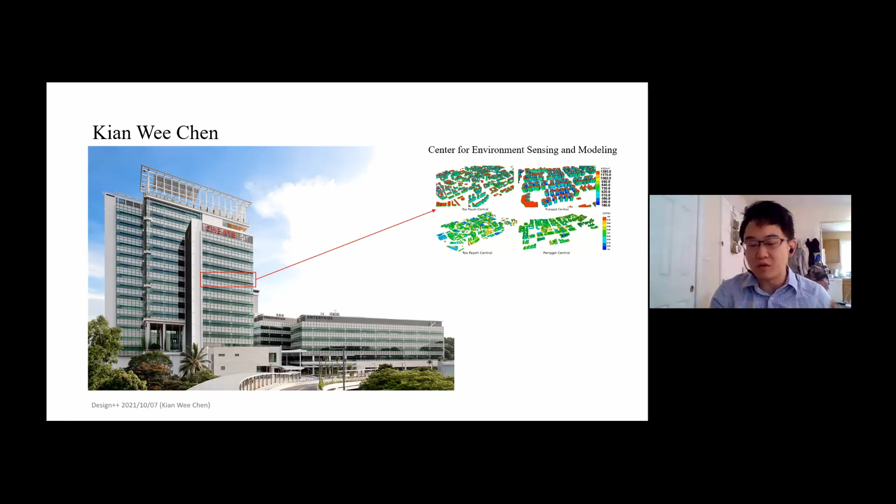In CENSAM, I work with a lot of non-designers, like urban climatologists, and during my stay here I was exposed to many different ways of working, and that inspired me to look at things differently in my research.

After my postdoc, I got a Distinguished Fellowship from the Andlinger Center for Energy and Environment in Princeton. So I flew halfway across the world to where I am currently, in Princeton. There I'm working with Forrest Meggers, who is an ETH Zürich alumnus too. We went back into looking at radiant cooling systems and how to more efficiently cool in the hot and humid climate. Again, we built physical prototypes to test out the system.

So back to the topic: algorithms, models, and data in the design process. Within all those projects, I've always been the guy at the back, handling or managing the models, the algorithms, and the data being collected in these different projects.

And what is the objective of using algorithms, models, and data? Essentially, it is to bridge the gap between different disciplines, enable designers to quickly get answers from models and data, and streamline that whole process so that it's easy to do, and designers can actually concentrate and focus on the creative task.

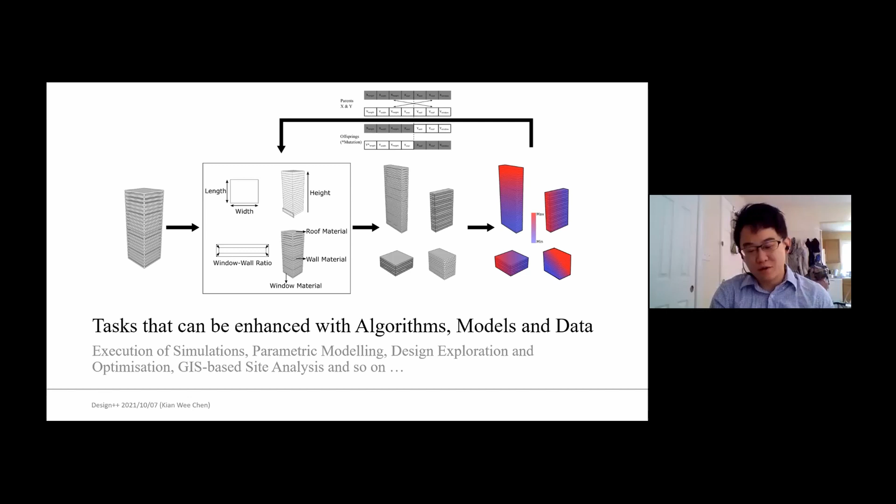The first project: processing terrestrial LiDAR scanned trees for multidisciplinary analysis. This was a project I did with an urban climatologist back in Singapore, who was doing carbon accounting. One of the problems is that he didn't have good detailed information about above-ground biomass for trees. He was essentially measuring them with a measuring tape and then estimating the carbon mass of the tree.

At ETH Zürich, in FCL, we had a terrestrial LiDAR laser scanner lying around. So we got our hands on it, and then we went out and did the scanning.

So you can create this whole scene of your interest. But the main issue with terrestrial LiDAR scanning is that it's unstructured point clouds. It's very hard to say how to get the trees and how to calculate the biomass and so on. So that's where I come in. We went down to scan, and I tried to develop a way to extract the tree of interest, take out the leaves, get the branches, and calculate the carbon biomass.

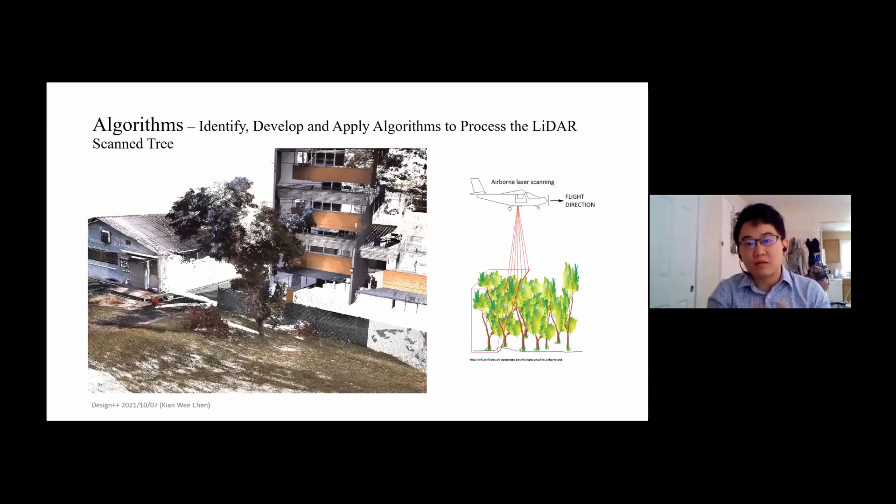So I developed a whole set of algorithms to do this. To start with, the first thing is how do you scan a tree. A tree of interest, you want to scan at least 3 points, three anchor points, so that you get all the facade of the trees.

And then once you get the trees, you combine the tree scans together. It's also important what hardware you're using. You need a specific wavelength of scanning so that it's easy to separate the leaves from the branches. Only certain wavelength scanners allow you to quickly separate the leaves from the branches.

Once you separate the leaves from the branches, this first 3 steps is kind of semi-automated. You interactively cut out the tree and so on. But once you get here and use the right scanner, you're able to separate the leaves from the branches. Then you can skeletonize the branches, and get the biomass of the tree. You can also get the branching order, the architecture of the tree.

For any botanists or people studying trees, it might be interesting to study the tree architecture and so on. The skeletonized tree volume was used in a carbon accounting model. Interestingly, what was found kind of supported the claim that trees are not a carbon sink in tropical cities.

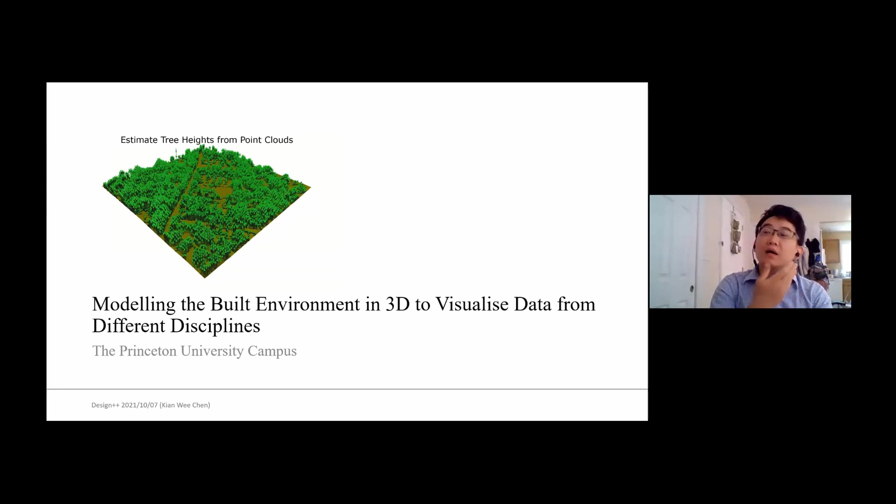So this is a project that tested that out. In this project we got the digital elevation model, the airborne LiDAR point clouds and so on, and the building footprints.

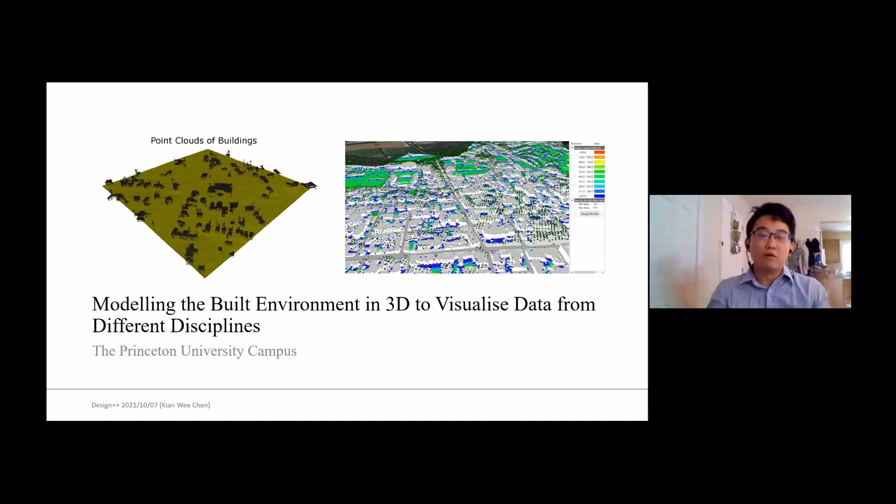And we were able to recreate the 3D environment of Princeton based on totally open geospatial data. And then we ran a solar analysis on the whole area.

One of the motivations was because one of the physics students, for her final year project, was interested in looking at powering a personal electric vehicle on campus. Is it a viable option to move around campus with just a solar powered, totally solar powered personal electric vehicle? It's also because the facilities staff at Princeton campus drive around in this little golf cart.

So she was interested. So we installed a solar panel on the golf cart and optimized the engine for solar charging and so on.

But essentially what I'm working on was to create this 3D model of the Princeton environment, which also has tree coverage and so on, so that it's possible to collect data on the golf cart routes and figure out their use ratio, their use to parking ratio.

And with the model and the solar analysis, you'll be able to find the optimal parking space. For example, if they park somewhere, make sure that it's not blocked and so on. So with the 3D model, you will be able to do that.

Because the main user of this kind of model is people not from architecture, the idea is that if it's an architect, probably Grasshopper or Rhino is accessible to them. But for a physics student and a mechanical engineer who was installing the engine in the cart, it's just not possible to get them to learn Rhino, right?

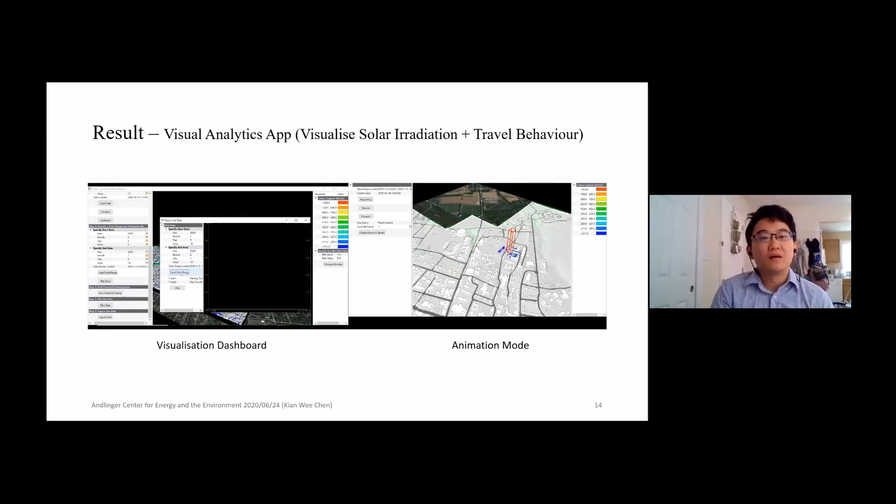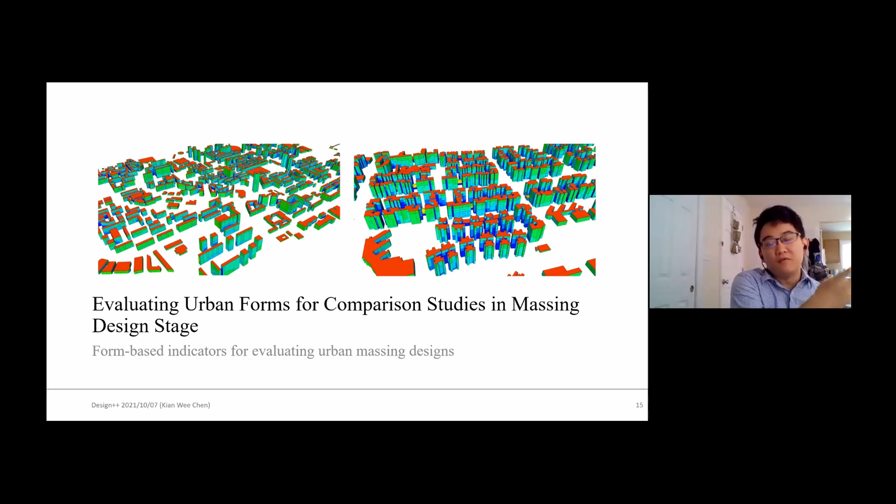So the third project is not so much about representing the 3D site, but in this project it's about evaluating it. So if you have a representation of the site, a 3D model and so on, how do you evaluate it? How do you know that this region is performing how well in relation to the other region?

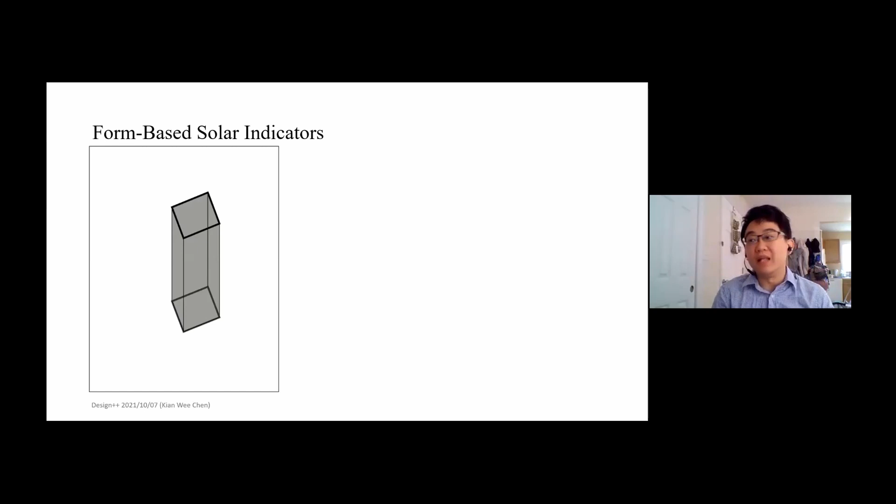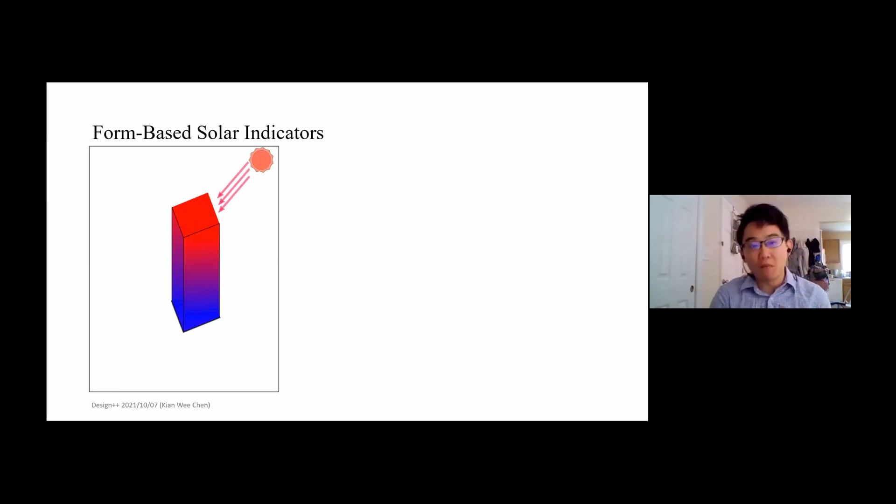The idea was to find a bunch of indicators, essentially a bunch of models that can inform the performance of a neighborhood, for example. So what I did was I found 5 indicators based on urban forms. As long as you have the physical form of the geometry of the site, you'll be able to perform this analysis.

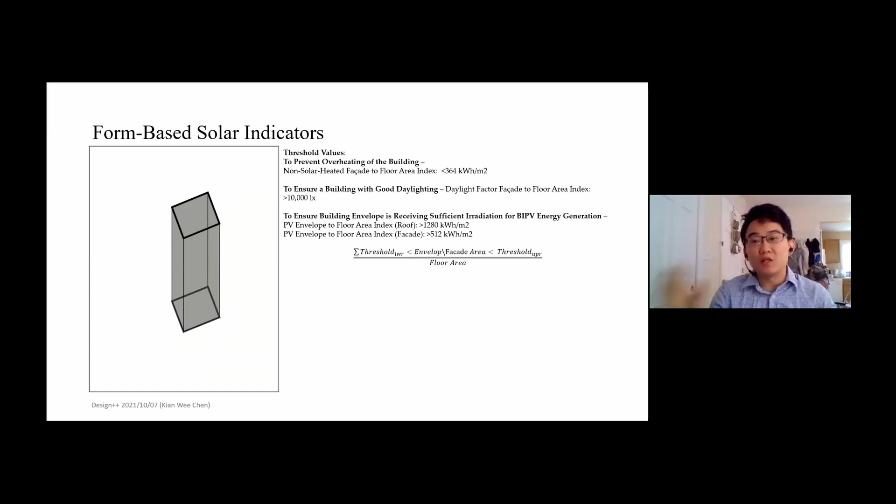So the first 3 are kind of solar based, where we run a solar analysis, let's say on a building, and then we have a ratio between envelope facade area that's within a certain threshold and divide it by the floor area.

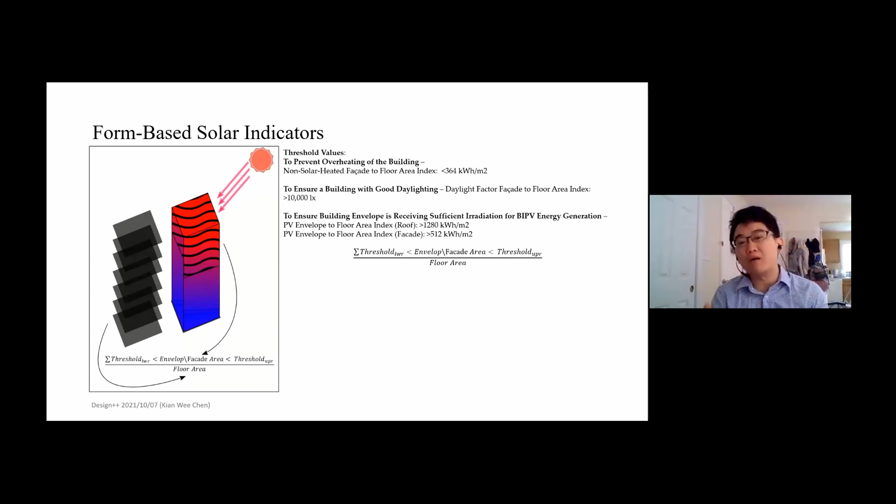For example, if you have daylighting, you want enough daylighting on the facade to serve the floor area, right? So you normalize it by the floor area, and then you have an idea of how well the envelope is performing. So if you run it on all of the buildings, let's say in a city, you can roughly have an idea of how well the morphology of that whole area is performing.

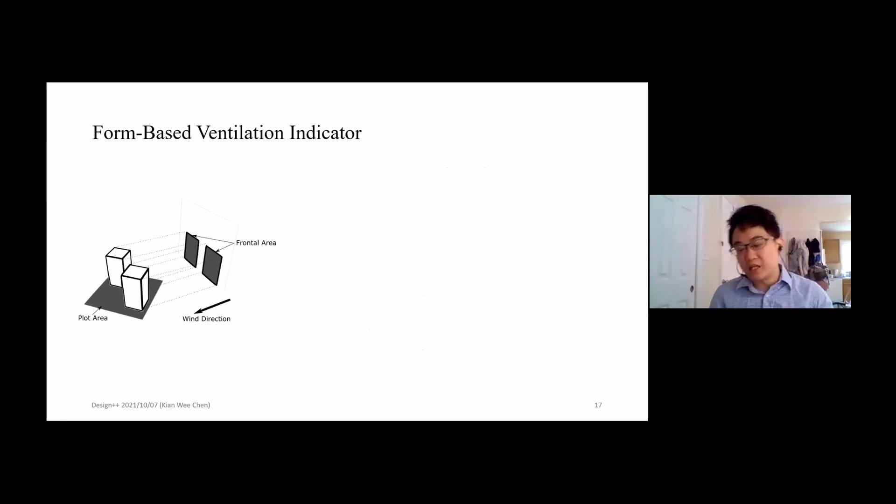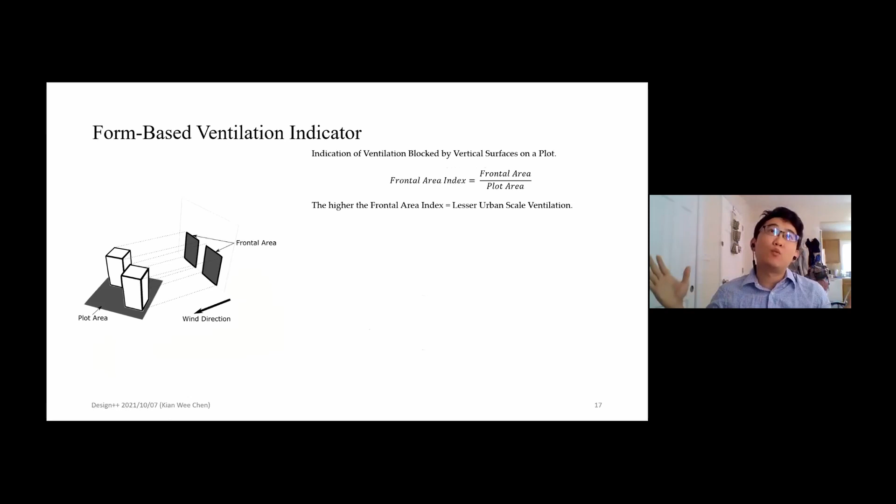In a solar sense. So the other indicator that I did was a ventilation indicator. They call it frontal area index, where you project your building envelope to the wind direction, and then the frontal area is divided by the plot area. So you have an idea of how much wind the building is blocking.

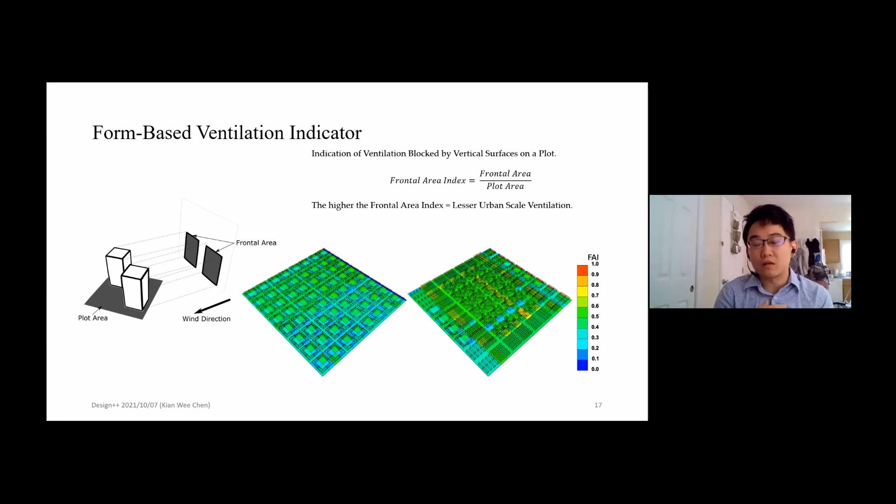So again, if you apply it to a big region, you can roughly have an idea of how well ventilated the neighborhood or this precinct is according to this indicator. You want it to be as low as possible. And this is a mobility indicator.

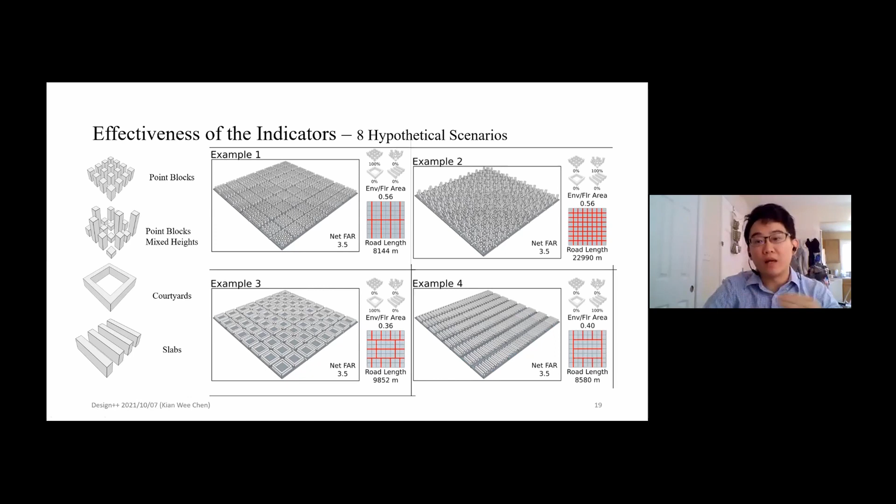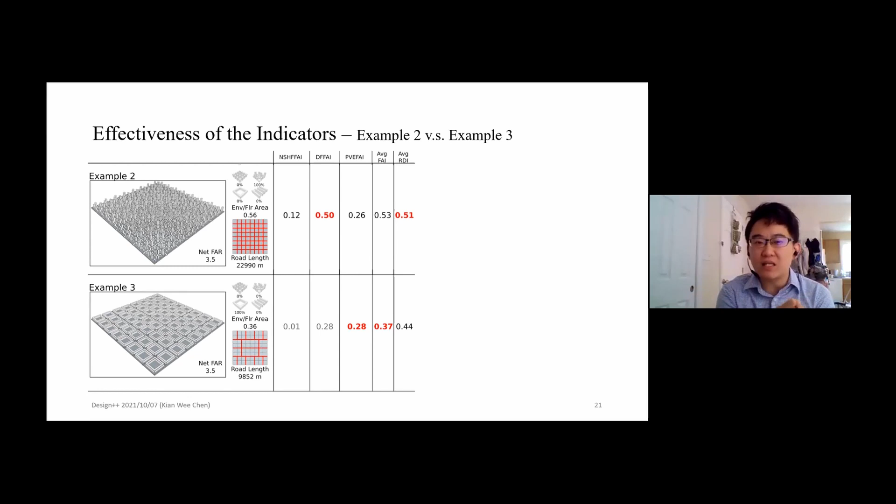So I did this on 8 different examples of different settings and different typologies, and these are the results. In short, it was able to detect morphological changes, but this is condensed into a single number where you can quickly see what's happening. It's much more effective if you were able to go into the model and see why the indicator is so.

There's of course still a lot of room for improving what this indicator can be. But essentially, the modeling and the solar analysis could still be used. You can see in example 2, it's performing quite well in terms of daylight availability, and for example 3, it's performing very well in terms of a frontal area index.

They're all building in terms of the same density and so on. Depending on different morphology, it will be good for different indicators - for ventilation, for solar, and so on. You can see the frontal area index is much better for the courtyard as compared to a mixture of point blocks and other typologies.

And this is the route directness index. If you use a full grid, the route directness index is the best, 0.51 here. But if you just reduce it - this is the road length, it's like 20,000 meters of road length compared to 9,852 - you only have a 0.07 reduction.

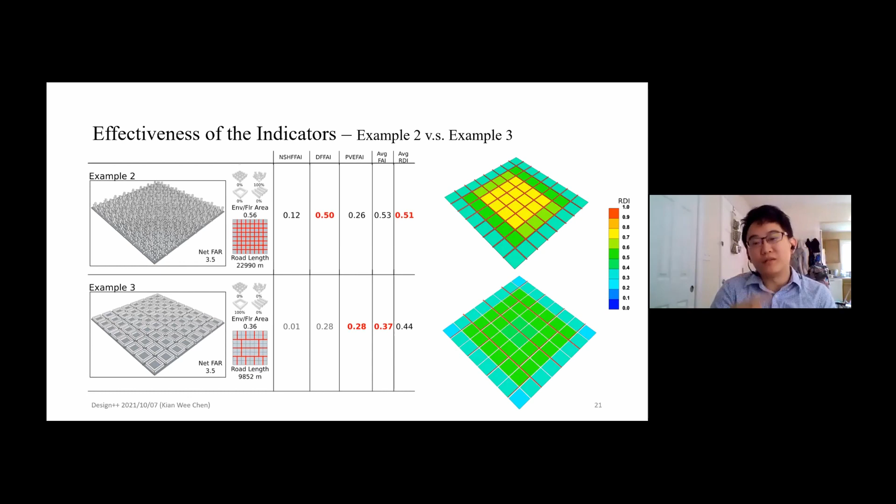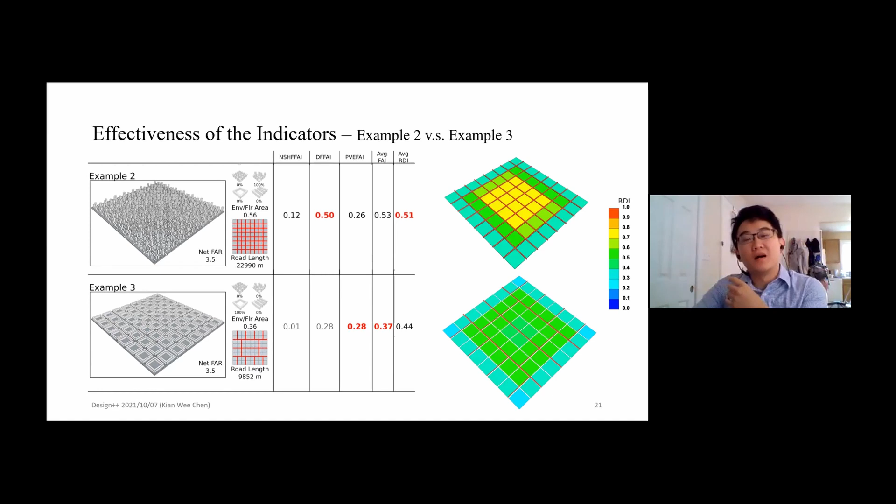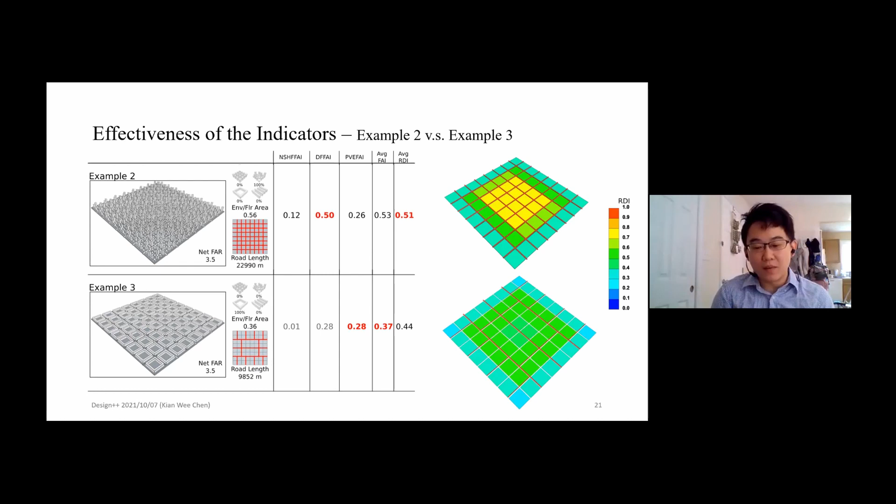This is something we still have to calibrate with empirical data, like what does 0.07 mean essentially. It's a half reduction in road length, but performance-wise, it's not that significant, it seems. So is this something worth pursuing? That kind of set of performance would give a designer better information to make a decision. Overall, fitness-wise, this seems to be the best example.

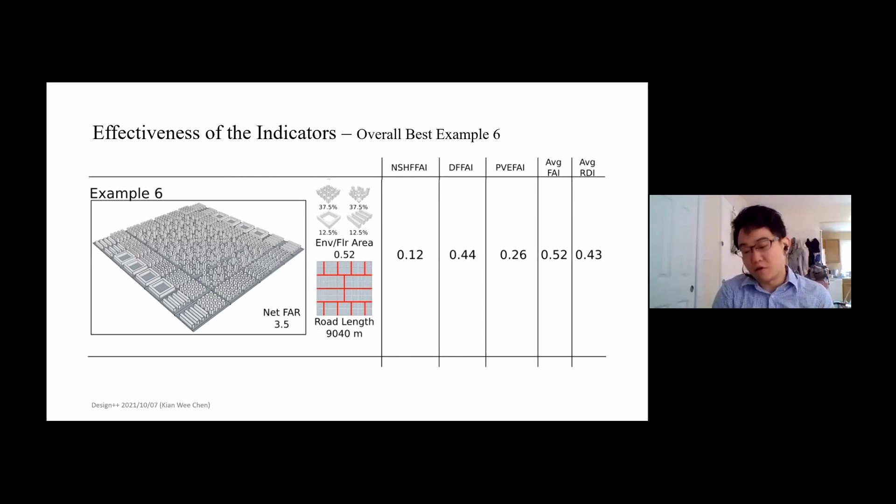So what I proposed at the end was that in Singapore, Singapore is divided into 51 regions and areas. What we can do is run this for all 51 regions, so we can have an idea of how each region is performing. And then we try to calibrate it - what does this indicator mean? What does 0.13, what does 0.37 in daylight availability mean?

So you perform this indicator on a big set of data, and then have an idea, and probably you have to go down and get some more real-time data than model simulated data, and see what exactly this number means. If possible, we can set national standards on what would be a good set of performance indicators to look at when designing for a neighborhood. That's the motivation for this project - to introduce a set of indicators that might be useful for planners.

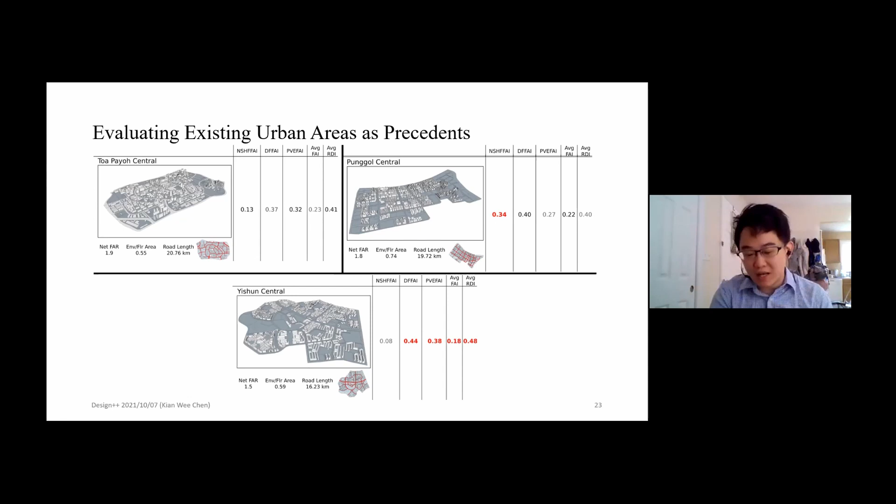So the next two projects are mainly about applying these design technologies in the design process. The previous three were more about evaluating and understanding the site analysis and the site. These two are really about applying it in design and how architects can use these design techniques in their design process.

So in this project, I'm using multi-objective optimization to optimize building form and envelope and cooling system to improve building energy performance. So the main aim of this design technology is to put it in the hands of designers and show how they can use it.

So first of all, in the multi-objective optimization process, you have to define your problem. The most classic and conventional problem in the design of an envelope is daylighting versus cooling. The more daylight you let in, the more it will increase the cooling load. This is in a tropical climate. So you want to get the right amount of daylighting, but not too much, so that the cooling load is still within a good

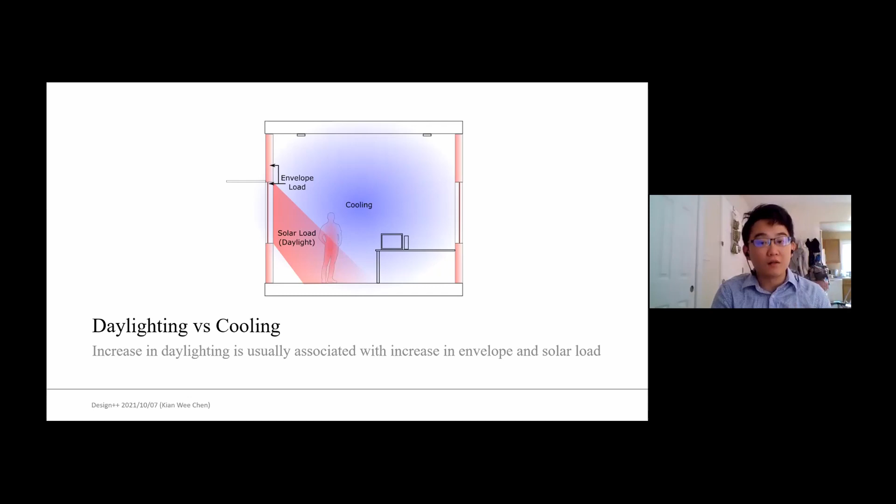load. So in this optimization process, we are looking at the envelope design, and if we are using a different cooling system, how would that affect the envelope design? So we are comparing the two main types of cooling system, radiant cooling and air-based cooling. You can see on the left side is radiant cooling.

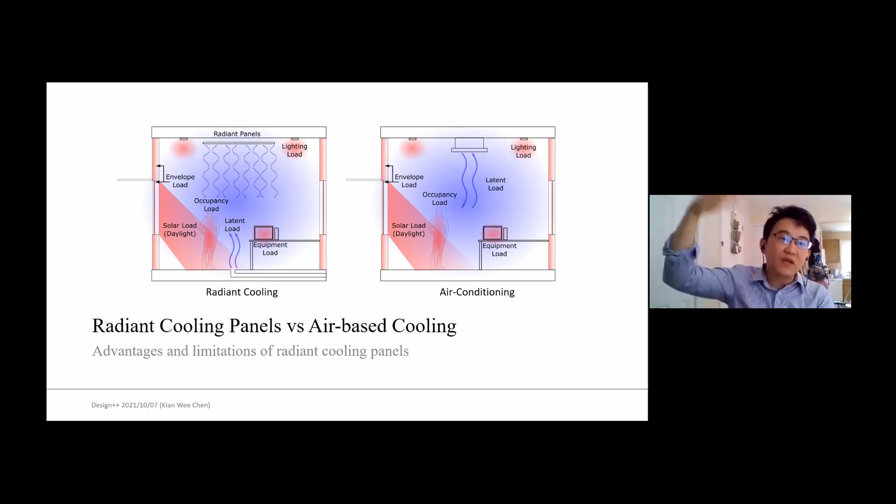Essentially radiant cooling is cooling by radiation. You cool down the surface of your interior, and that surface exchange removes heat from the occupants, as compared to air-based, where you throw air into the space and then that air cools down the occupants.

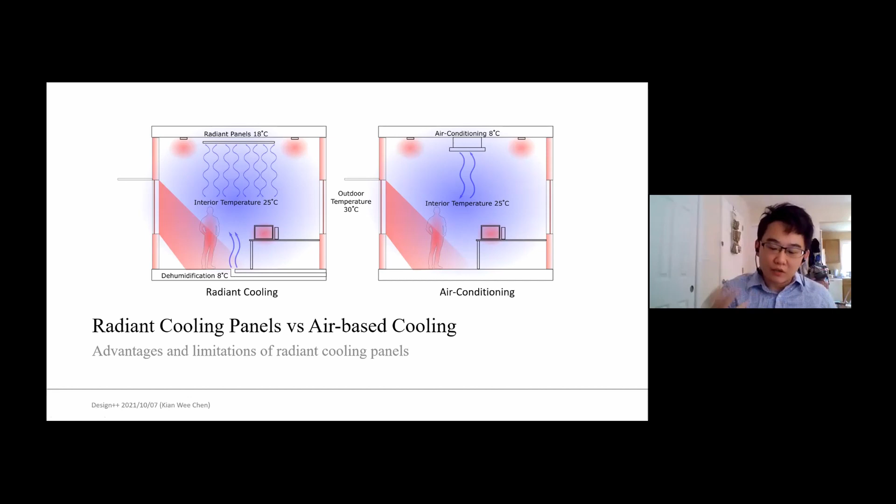So the main difference is that radiant cooling uses less energy because, as you can see in this diagram on the left side, radiant cooling uses 18 degrees Celsius cold water to perform cooling, while air conditioning uses 8 degrees Celsius. So that increase in temperature difference reduces the need for cooling energy.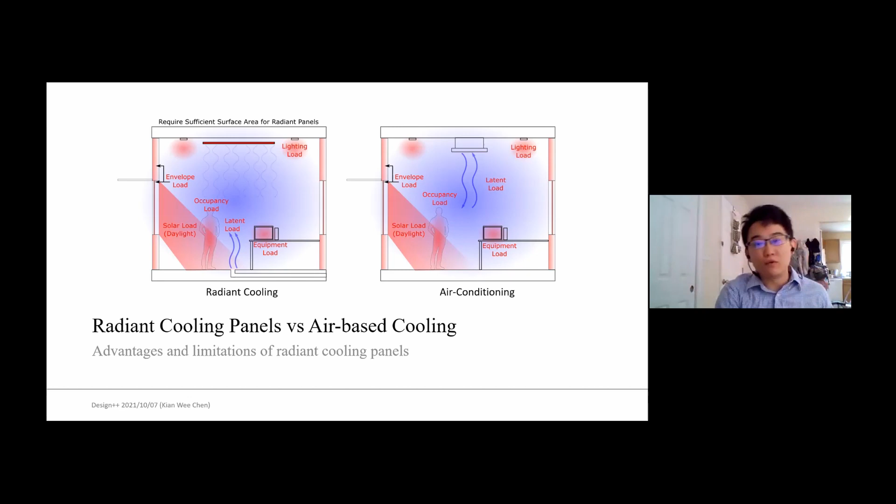But there's one limitation to radiant cooling: there's a capacity limitation. If you do not have enough surface, you can't sufficiently cool the person. And because of the condensation issue, you can't use chilled water that's too cold, right? It has to be above the dew point temperature. So there's a possibility that you do not have enough activated surface in the interior to sufficiently cool down the space. So that's the issue here.

And this was built into the optimization problem formulation: the thermal model that's being set up actually checks the activated surface, which is the ceiling. Is there enough ceiling surface area to install radiant panels to sufficiently cool the person? If it's not enough, it will use the air-based cooling, which is less efficient.

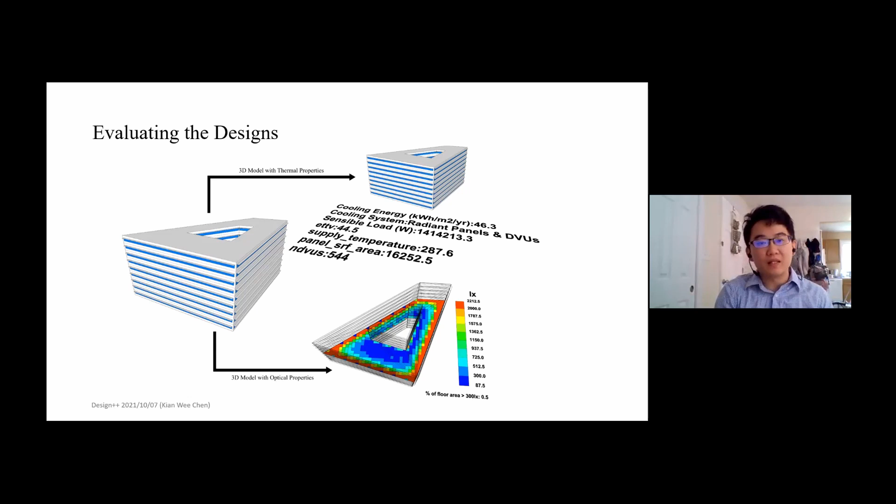And at the same time, we have another model that's looking at the daylight performance. So you want to balance both of these in your design process. So these are the two models evaluating the design solution. And the case study is a typical 5-story office building in Singapore.

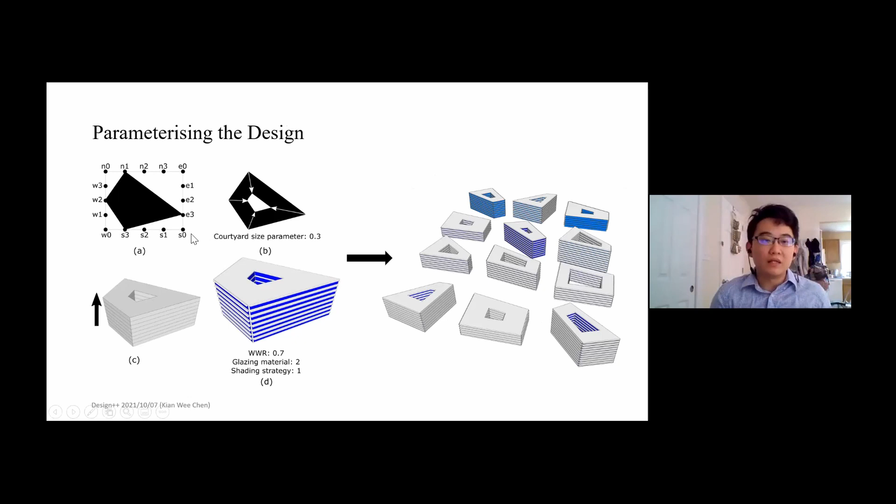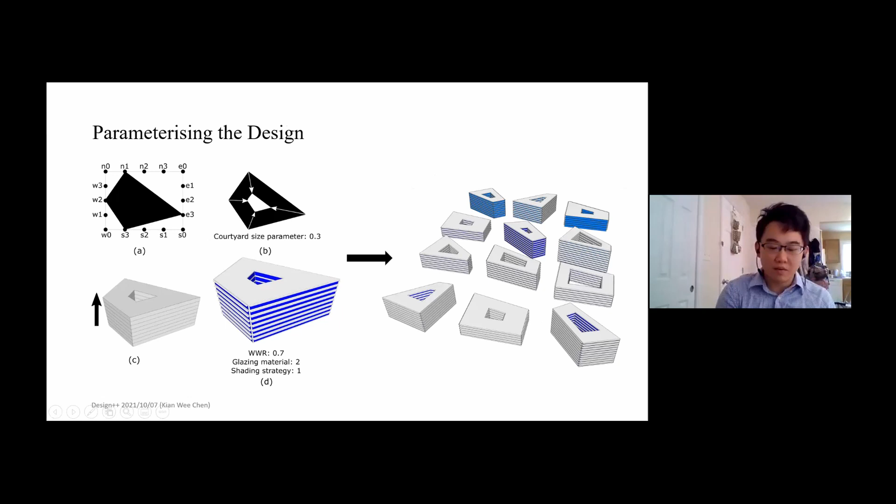So first of all, you have to parameterize your design so that it's able to generate multiple design variants. You can see how the design was parameterized. In A, you define 4 points, create a footprint, extrude it, and then decide the window to wall ratio, the glazing material, and so on. You can see the multiple design variants generated from a single parametric model. You put that parametric model into the optimization algorithm.

In the optimization algorithm, a solution is represented by a series of parameters, for example the 4 points, the window wall ratio, the window glazing materials, and so on. In the algorithm, they crossbreed and mutate, and when you combine two, you get another two different design variants from the parent variants, and then you evaluate them with the two models,

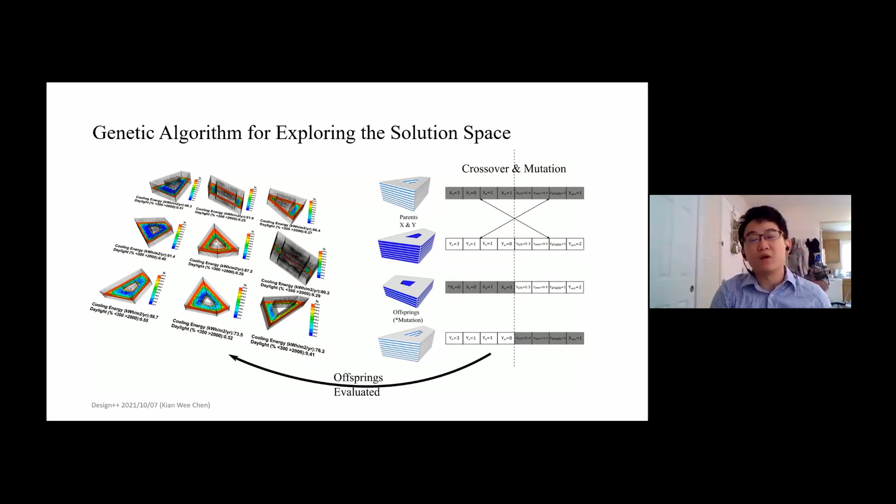and then you only pick the strongest, the better performing, and again put them into the optimization algorithm and breed them, so they will have stronger children and so on. So essentially it's mimicking evolution, and you generate better and better designs. So here, each dot is a design option.

We generated 5000 designs, and we just stop it. So it's mainly to explore the relationship between envelope, building systems and the design. So we can see that there's 4 clusters here, and the red dots are the Pareto front. So what is a Pareto front? So the optimal is essentially you want to reduce energy consumption and you want to increase daylighting. And this is the optimal region that you want to be in. And the red dots are the Pareto front that's kind of moving towards that region.

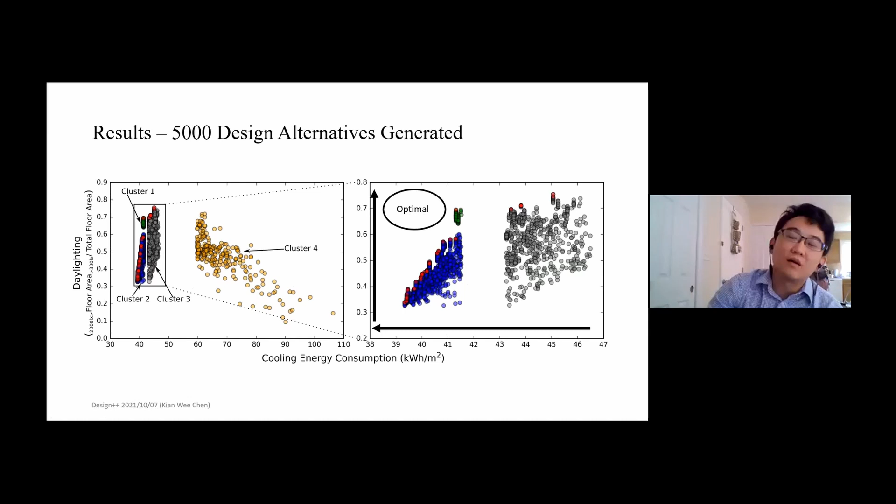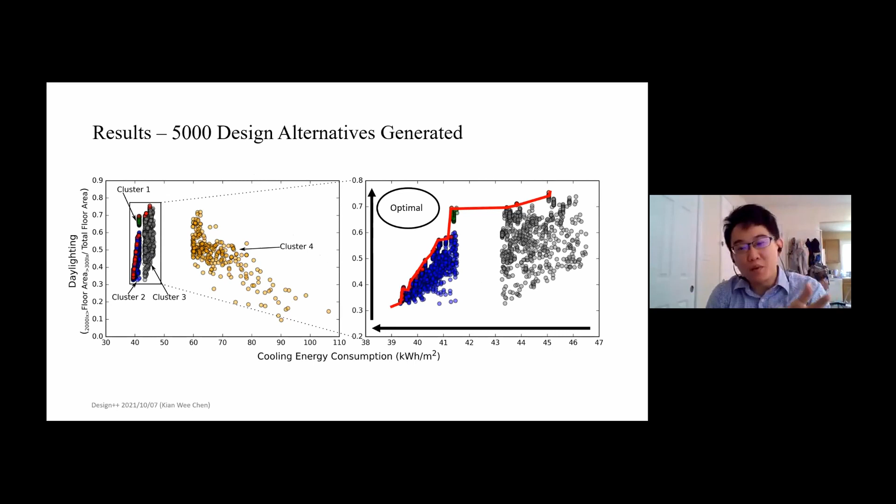But I think what will be really interesting is to look at the clusters. So now we're going to zoom into the clusters. So in cluster 1, you can see they are very close to the optimal region. And you can see they are very similar looking in terms of building form. So they are in Singapore, you are north-south facing. You have a long north-south facing facade and short east-west facing facade. And then they achieve a good

performance. But if you're interested more in, let's say, more variation in terms of forms, you can look at cluster 3. Yeah, so it's not as good performing, but you can see it's still using radiant cooling. I'm sorry, so I kind of missed that. So they're still using radiant cooling, and they have more varied form. So it's kind of trading off variability in forms to performance.

So if you're really into performance, look at designs from cluster 1 and try to design mimicking forms that are generated in cluster 1. If you are willing to trade off a little bit of performance for more variability in design, you can look at cluster 3. So there is some flexibility where you can vary your form, and then you can look at it and try to design based on that.

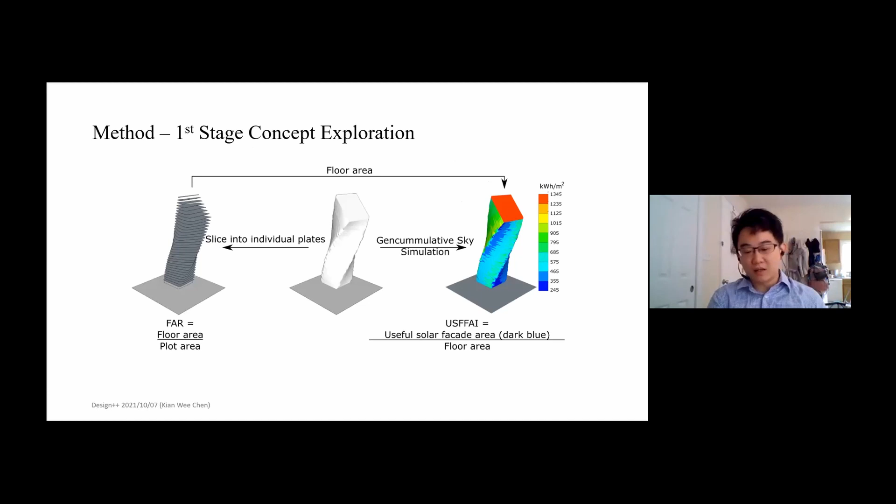And I gave them the script that would automatically calculate the performance. I divided the whole workshop into 3 main stages. The first stage I call concept exploration. They model some kind of massing in SketchUp. SketchUp is the easiest to pick up. Among the students, there were year 1 students that had never touched CAD before, but because SketchUp is so intuitive, they were able to pick it up, model a simple design and put it into the script, and then it will spit out performance in terms of the floor area ratio and the solar availability. You want to maximize both performances.

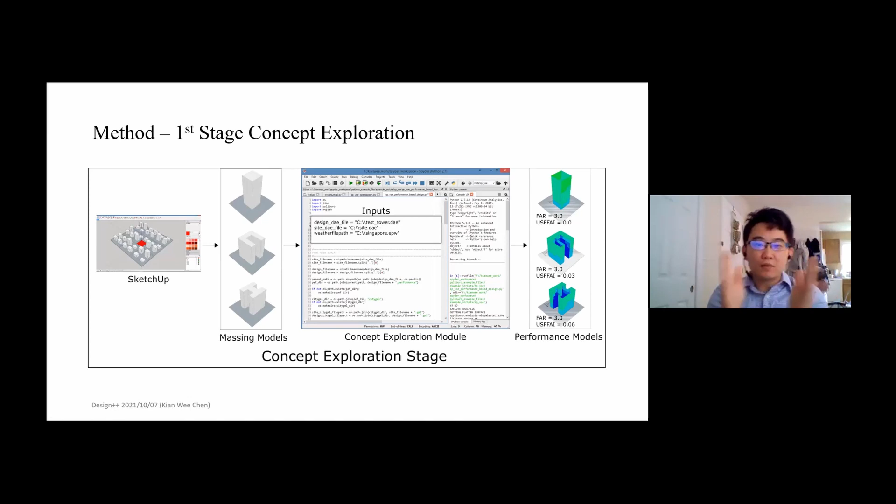So the first stage is quite manual. You model it, you put it in, and then you evaluate. The second stage, I gave them a set of morphological operators, so they can twist and turn their design massing, and that will create multiple different design variants. Again, they would model the massing in SketchUp, put it into the script, and then specify, say, twist the tower 45 degrees, or taper the tower by a 1.2 value, and so on. Once they specify the parameter changes, they will generate multiple design variants, evaluated based on solar availability and density.

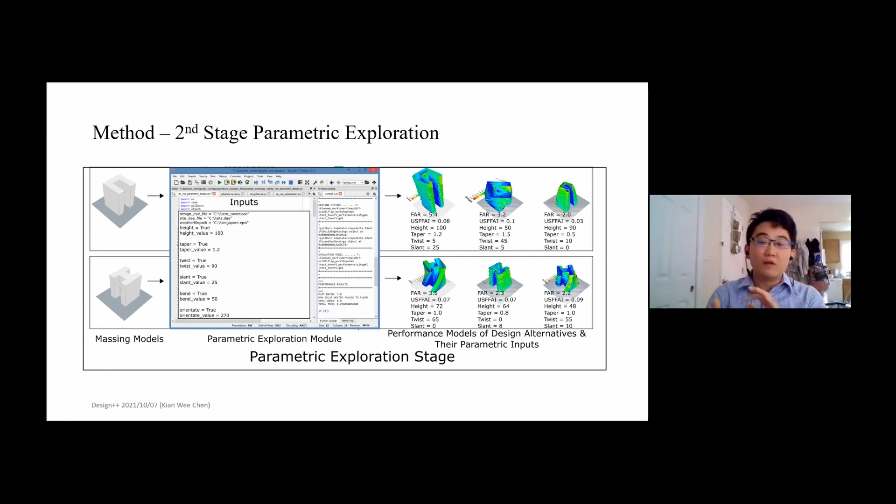And the third stage I call algorithm-assisted exploration, where the students again start with modeling the massing in SketchUp, and then they put it in and parameterize the building. Instead of specifying a single value, now they specify a range, put it into the optimization algorithm and run it for the night. So you can generate a few hundred designs, and then they can explore the designs generated based on their massing model.

So this is a submission of a student. Most of the students were able to do it when the whole design process is streamlined, but there's still some freedom when they are building their massing model, because they can still create different massing and then parameterize it with my script. You can see that they're trying to maximize both. You have some design variants on the Pareto front, and they can look at it and decide whether it's useful, and what the right parameters are that they want to use

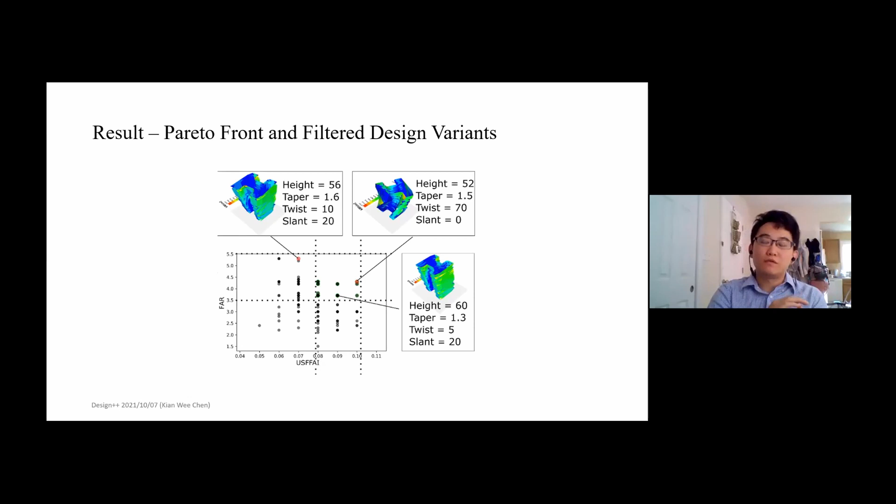But of course, I think the design problem formulation wasn't that well thought of by me. So if I was able to do it again, I would probably think of a better problem formulation for this problem. But looking at what the students have submitted, it's quite clear that as more design options are explored, they get better performing designs.